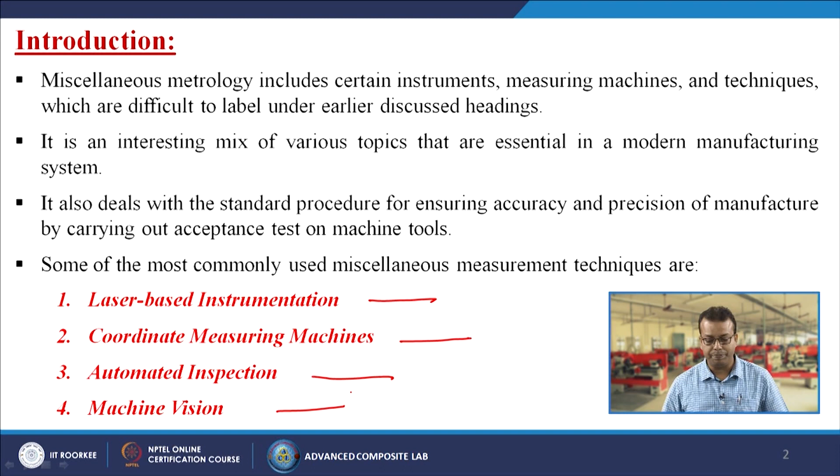So now first let us discuss laser based instrumentation. Generally these techniques are increasingly being used in applications like machine tool assembly to ensure the perfect alignment of machine parts. Traditionally lasers were more used by physicists than engineers, since the frequencies of lasers were not stable enough. So what is the full form of laser? Light amplification by stimulated emission of radiation. It is an intense emergent beam of light that can be parallel to a high degree or can be focused onto a very small area. Although a number of materials may be used to produce lasers, the helium neon gas laser is the most popular for applications in metrology.

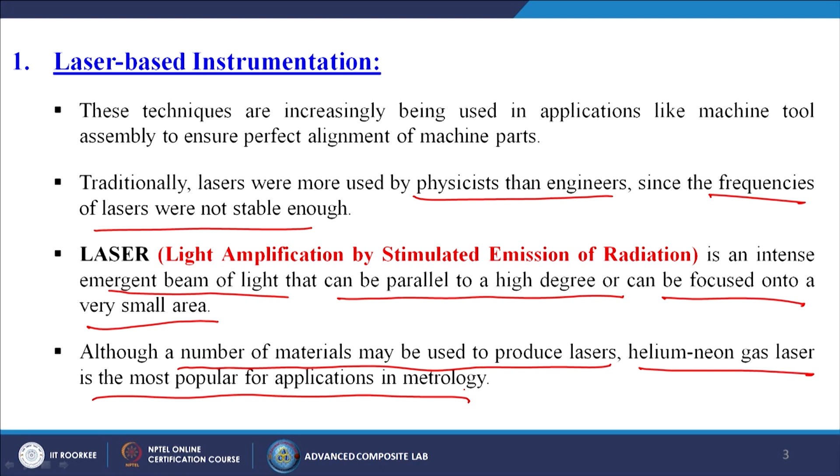Now what are the properties of laser? For the purpose of measurement, laser has some additional properties that are not possessed by ordinary light. First, it is monochromatic. Laser light has bandwidth in the range of 0.4 to 0.5 micrometer. Stabilized lasers have still narrower bandwidths, with the result that very high resolution can be achieved during measurement. So laser light is monochromatic in nature, whereas ordinary light is polychromatic.

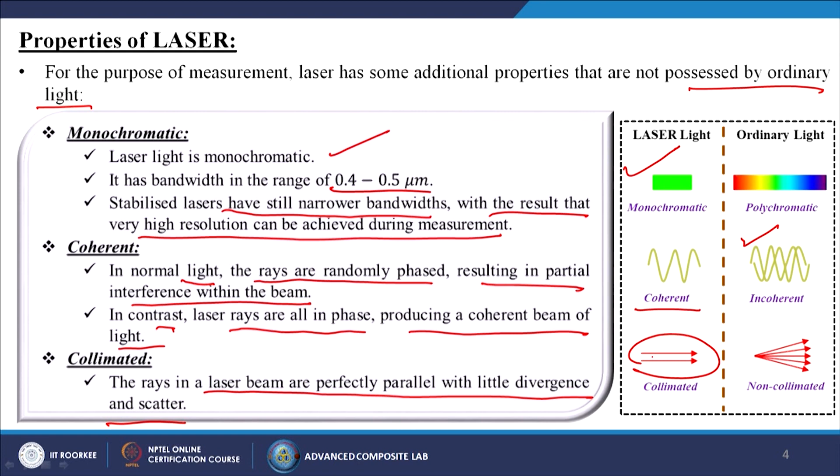Next comes coherent. In normal light the rays are randomly phased, resulting in partial interference within the beam itself. In contrast, laser rays are all in phase, producing a coherent beam of light. So laser is coherent, and ordinary light is incoherent. Then the last one is collimated. Sometimes you may have heard about collimated lasers. The rays in a laser beam are perfectly parallel with little divergence and scatter. So laser is collimated, and normal light is non collimated.

So what are the instruments based on laser principles? Like the laser scanning micrometer and the laser interferometer. The laser scanning micrometer features a high scanning rate which allows inspection of small workpieces even if they are fragile, at high temperature, in motion or vibrating. So what is the working principle? A transmitting unit emits a laser beam that scans at a very high and known speed across the measuring range. Every object placed in the measuring field interrupts the laser beam and casts its shadow into the receiver. By measuring the shadow time, the outside diameter of the part can be exactly computed.

In addition to the diameter measurement, by checking other combinations of light and shadow segments, it is possible to measure any other dimensions related to the shadow cast by the part. So simply, I have the cylinder, I have the emitter which is generating the laser, and the laser passes by that particular cylinder and comes into the receiver end. So we measure the light and how much time it is taking to pass through that particular material. If the material has some pores or cracks, automatically the laser will go faster.

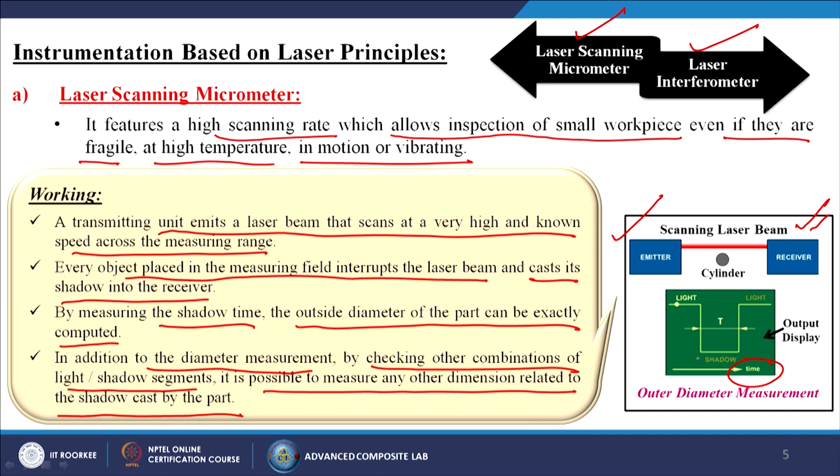If there is a certain obstacle, automatically it needs time. So, by calculating the time, easily we can detect whether there are any cracks or any kind of pores present or not, or whether the wall is a solid one.

What are the applications? Generally inline glass fiber or fine wire diameter we can measure through it, outer diameter and roundness of cylinders, gap between rollers, thickness of film and sheet, dual system for measuring large outside diameters, taper and form measurements. So, in all these cases generally we are using these techniques.

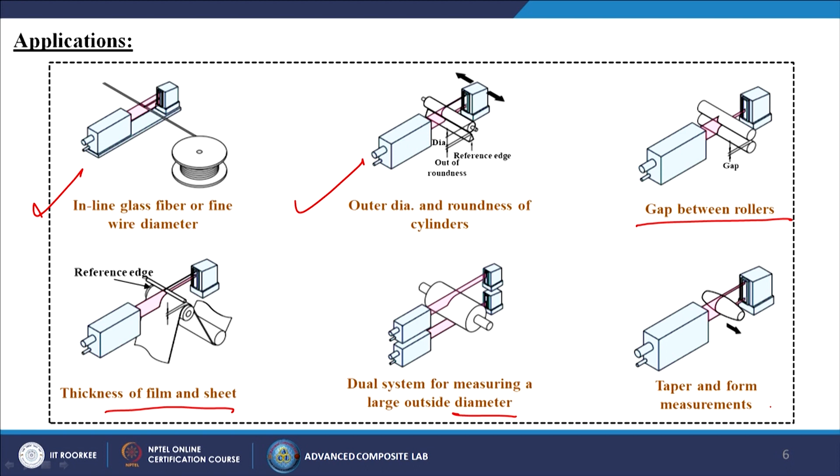Next, the second one is called the laser interferometer. In recent times, laser based interferometers are becoming increasingly popular in metrology applications. The fixed unit called the laser head consists of a laser, a pair of semi reflectors and 2 photodiodes. The sliding unit has a corner cube mounted on it. So, this is the schematic view of our laser interferometer.

So, how does it work? Generally the laser light first falls on the semi reflector P. So, here the laser is coming, this is the first reflector and then S is the second reflector. P is partially reflected by 90 degrees and falls on the other reflector S. So, directly it is coming to S. A portion of light passes through P and strikes the corner cube, here it is the corner cube.

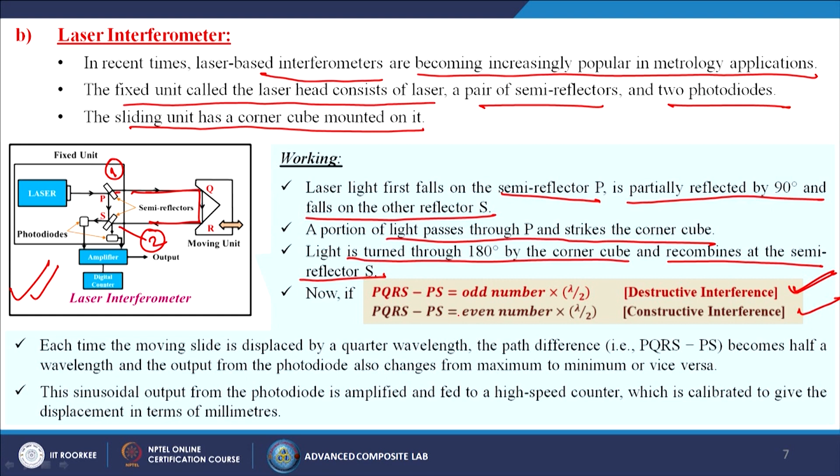Next, light is turned through 180 degrees by the corner cube and recombines at the semi reflector S. So, in this particular case it is coming, rotating exactly 180 degrees, and falling on S. Now, if PQRS minus PS is equal to an odd number into lambda by 2, that is called destructive interference, and if PQRS minus PS is equal to an even number into lambda by 2, that is constructive interference.

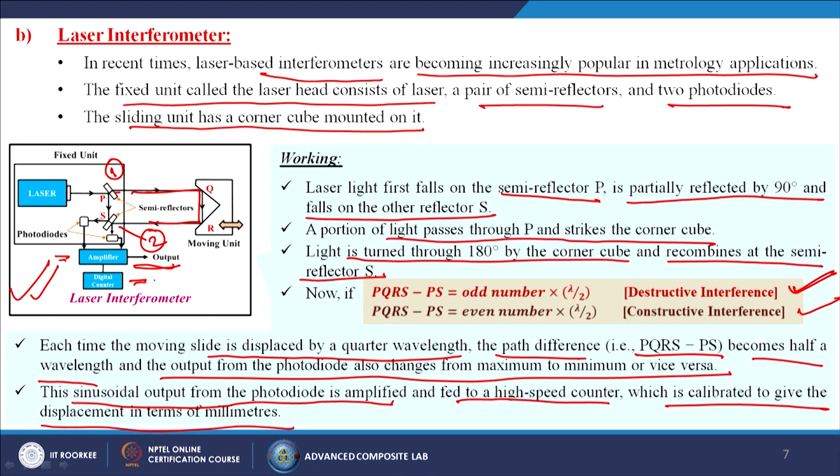Each time the moving slide is displaced by a quarter wavelength, the path difference, that is PQRS minus PS, becomes half a wavelength and the output from the photodiode changes from maximum to minimum or vice versa. This sinusoidal output from the photodiode is amplified and fed to a high speed counter which is calibrated to give the displacement in millimeters. So, here is the output we are getting through this amplifier, and now we have the digital counter.

Now, next we come to the coordinate measuring machines. In short, it is known as the CMM. This is a widely used technique. So, how is it working? Measuring machines refers to the single axis measuring instrument, and coordinate measuring machines are capable of measuring in all 3 orthogonal axes. So, that is the difference.

So, a CMM enables the location of point coordinates in a 3-dimensional space. It simultaneously captures both dimensions and orthogonal relationships. Another remarkable feature of CMM is its integration with a computer. So, directly we are getting the results into the computer itself. The computer provides additional power to generate 3D objects as well as to carry out complex mathematical calculations. Complex objects can be dimensionally evaluated with precision and speed.

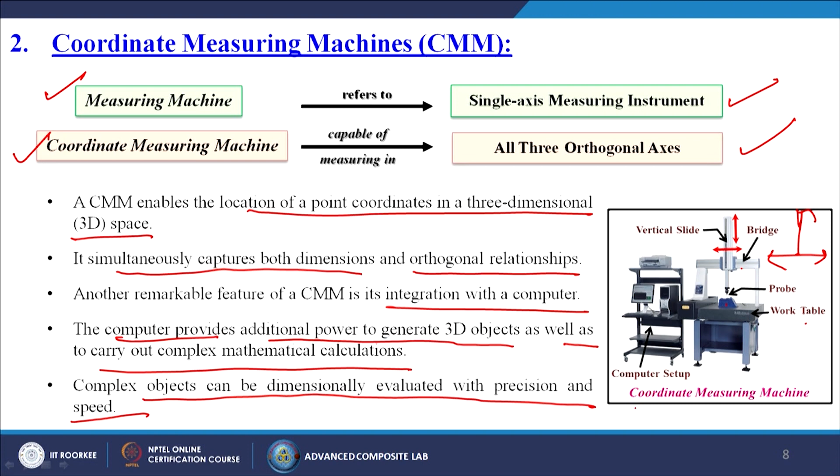So, now we have the bridge and the vertical slide. That means it can move in the vertical direction, and it can move along the bridge also, so it can move in the x and y directions together. This is our probe, and this is the work table, on which we put our workpiece, and this is the computer setup where we get our results. So, this is the coordinate measuring machine.

Comparison between conventional and coordinate measuring technology. A comparison of coordinate metrology with conventional metrology shows the important advantages of CMMs. Conventional metrology: manual, time consuming alignment of the test piece. For coordinate metrology, alignment of the test piece is not necessary. In the conventional case, single purpose and multi point measuring instruments make it hard to adapt to changing measuring tasks. For coordinate, simple adaptation to the measuring tasks by the software itself. Now, software is doing everything.

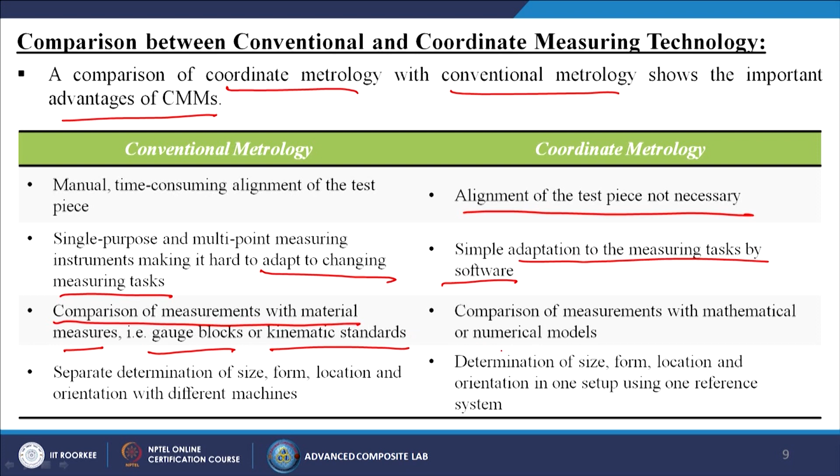Next, for the conventional case, comparison of measurements with material measures like gauge blocks or kinematic standards. Whereas for the coordinate system, comparison of measurements with mathematical or numerical models.

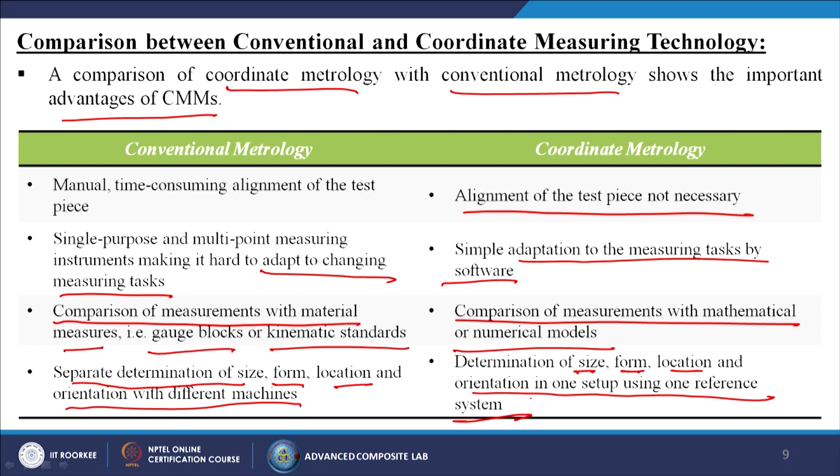For conventional metrology, there is separate determination of size, form, location and orientation with different machines; it is not a combination. Whereas a CMM can measure the size, form, location and orientation in one setup using one reference system. So, we can get all the results from a particular equipment.

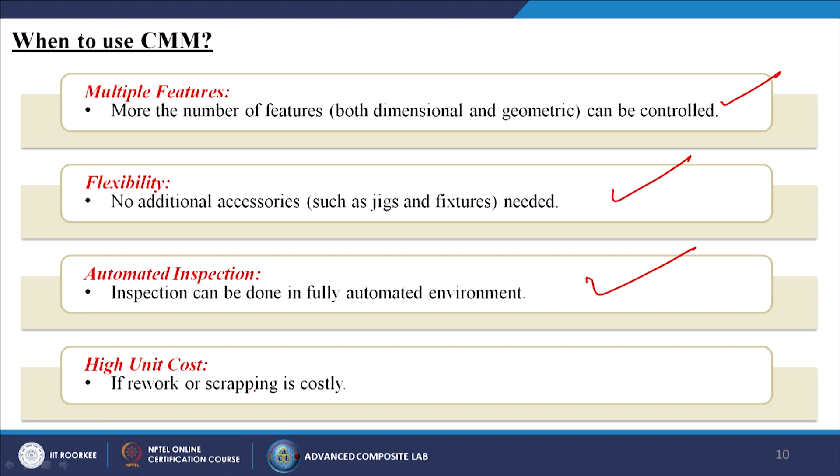Then when to use the CMM? Multiple features: more features, both dimensional and geometric, can be controlled. Flexibility: no additional accessories such as jigs and fixtures are needed. Automated inspection: inspection can be done in a fully automated environment. And high unit cost, if rework or scrapping is costly. Then the structure of the CMM: the basic version of a CMM has 3 axes along 3 mutually perpendicular directions.

So, in this particular case you can see it can move in the x axis, the y axis and the z axis. So, if I have one object, from all 3 sides it can measure the exact dimension, shape, size or maybe the defects. A carriage is provided for each axis, which is driven by a separate motor. The 3 carriages of a CMM form a Cartesian reference coordinate system. The work volume is cuboidal.

Each axis is fitted with a precision measuring system which continuously records the displacement of the carriage from a fixed reference. The third axis carries a probe. When the probe makes contact with the workpiece, the computer captures the displacement of all 3 axes.

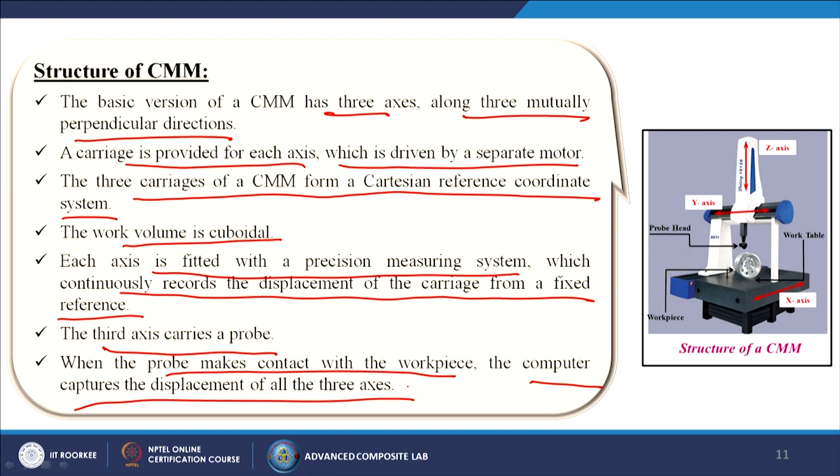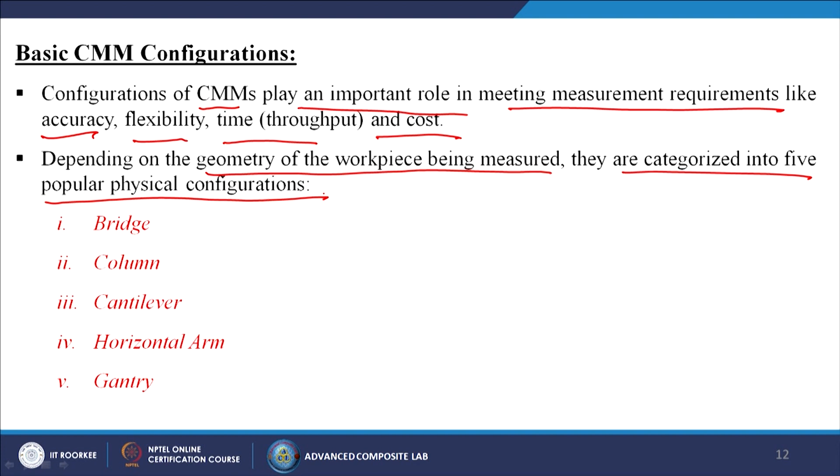Basic CMM configurations. Configurations of CMMs play an important role in meeting measurement requirements like accuracy, flexibility, time, that means throughput, and of course the cost. Depending on the geometry of the workpiece being measured, they are categorized into 5 popular physical configurations: the bridge, the column, the cantilever, the horizontal arm and the gantry.

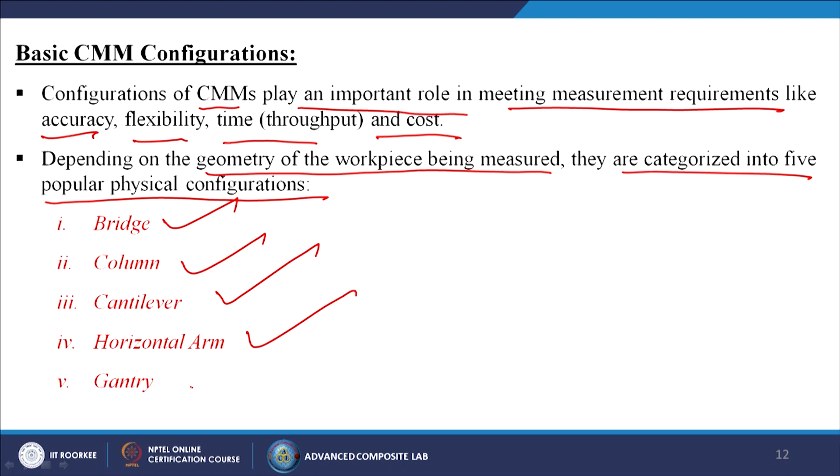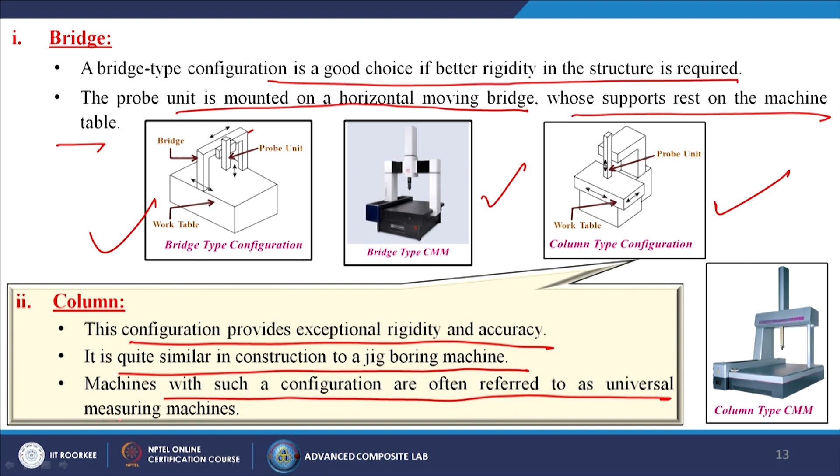The machine looks like this, and this is known as the column type configuration. In this case this is moving in these directions and the table is moving in these directions. The column configuration provides exceptional rigidity and accuracy. It is quite similar in construction to a jig boring machine. Machines with such a configuration are often referred to as universal measuring machines, and this is the column type CMM.

Now, we come to the cantilever. The vertically positioned probe is carried by a cantilevered arm. You can see the cantilever arm; there is no support on this side. The probe moves up and down along the z axis while the cantilever arm moves in and out along the y axis, and the table moves in the x direction. So, the longitudinal movement is provided by the x axis, which is the work table. The configuration provides easy access to the workpiece and a relatively large work volume for a small floor space. This is the image of the cantilever type CMM.

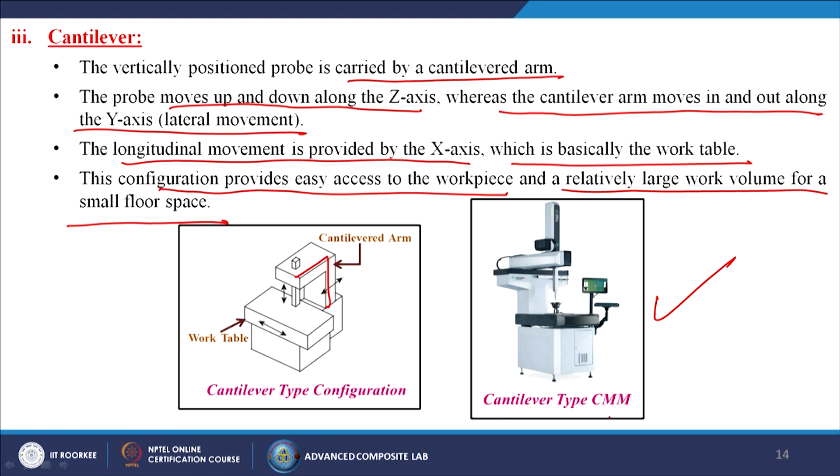Now, we come to the horizontal arm. In this type of configuration the probe is carried by the horizontal axis. The probe assembly can also move up and down along a vertical axis. It can be used for gauging larger workpieces since it has a large work volume. In this case the probe arm moves in these directions, and the arm also comes up and down in these directions.

Now we come to the gantry, the last one. In this configuration the support of the workpiece is independent of the x and y axes. Both these axes are overhead and supported by 4 vertical columns from the floor. So, you can see this moves in these directions, this arm moves in these directions, and this can go up and down also.

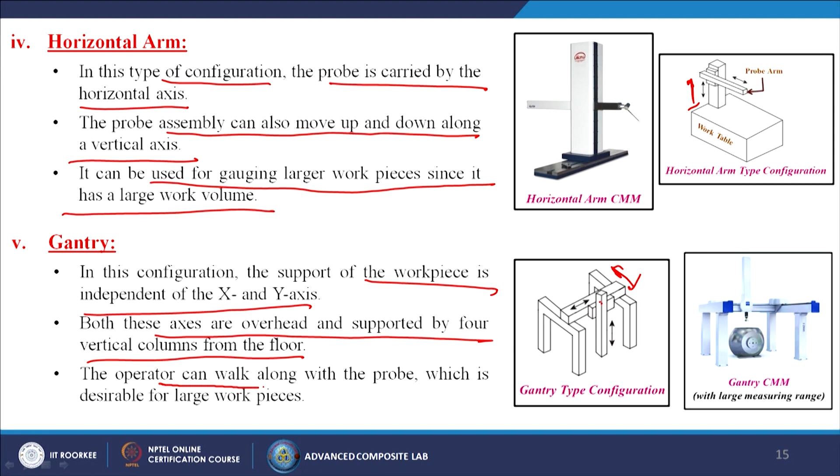So, the operator can walk along with the probe, which is desirable for large workpieces. Now, this is the image of the gantry CMM. Now, one question may come into your mind: which is the best, or which we are going to use, or which will give you the best results.

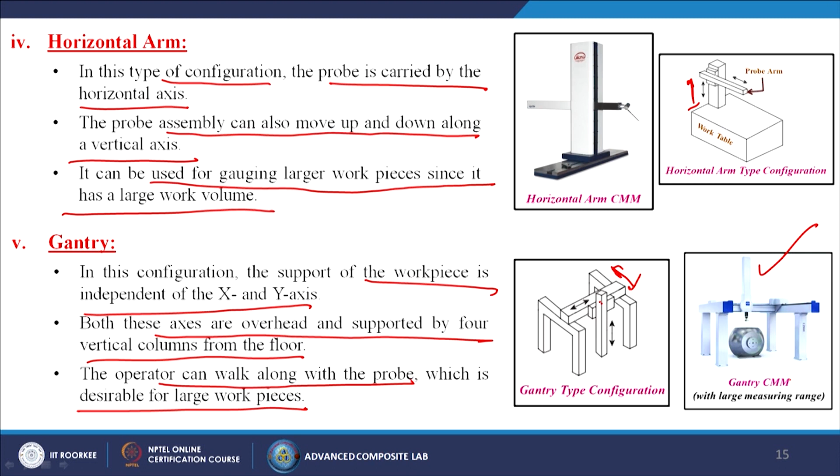See, the basic thing is how your material is, what is the shape of your materials. Based on the shape and size of your materials you can choose any of the options, because you need the results. At least you have to give flexibility to these measuring machines, so that the probe can reach all the corners. So, based on your shape and size you can choose any option which is suitable for your material shape.

Now, what are the modes of operations? Generally the modes of operations are quite varied in terms of type of construction and degree of automation. CMMs can be classified into the following 3 types based on their modes of operation. What are those? First one is called the manual, second one is called the semi automated, and third one is the computer controlled.

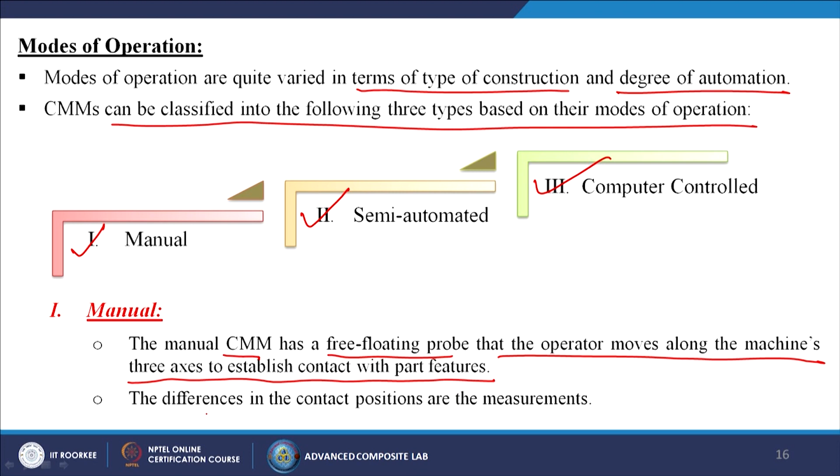When we are talking about the manual, the manual CMM has a free floating probe that the operator moves along the machine's 3 axes to establish contact with part features. The difference in the contact positions is the measurement. Now, the second one, the semi automated one. A semi automatic machine is provided with an electronic digital display for measurement. Many functions such as setting the datum, change of sign, and conversion of dimensions from one unit to another are done electronically.

And the last one is the computer controlled. A computer controlled CMM has an onboard computer which increases versatility, convenience and reliability. Such machines are quite similar to CNC machines in their control and operation. Computer assistance is utilized for 3 major functions. A programming software directs the probe to the data collection points. Number 2, measurement commands enable comparison of the distance traversed to the standard built into the machine for that particular axis. Number 3, computational capability enables processing of the data and generation of the required results.

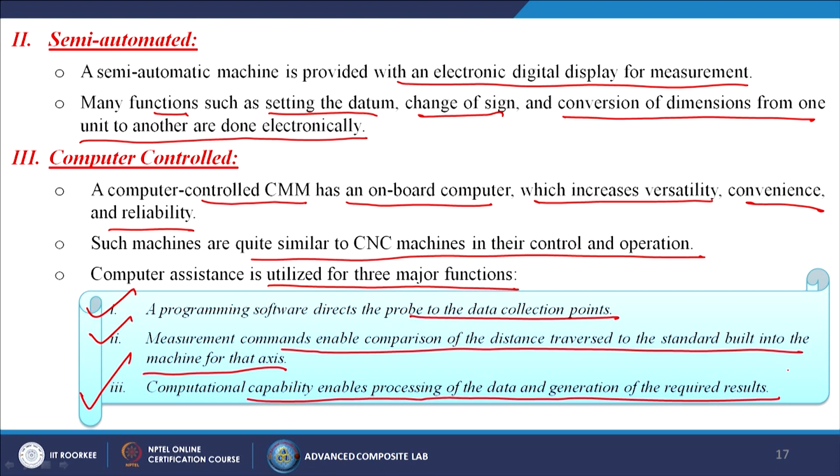Now, come to the probe. The probe is the main sensing element in a CMM. Various types of probes are used in CMMs, including mechanical probe, optical probe, laser probe, white light probe. These probes can be categorized as contact type and non-contact type. From the name itself you can understand contact type means the probe will touch your sample, and non-contact means the probe will not touch your sample. Contact type probes are in physical contact with the workpiece when the measurements are taken. Most non-contact probes employ a light beam stylus.

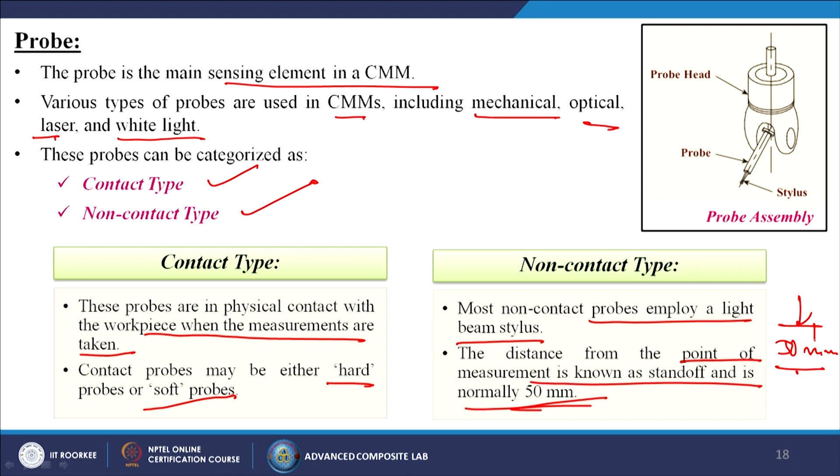Contact probes may be either hard probes or soft probes. Either it will just touch your materials, or it will be very soft, so that it can take a certain area and rub onto your surface itself. For the non-contact probe, the distance from the point of measurement is known as the stand-off and is normally 50 millimeters. So, there will always be a gap between your probe and your surface, and the normal, standard one is 50 millimeters.

Now, operations of the CMMs, how it works. A modern CMM is very similar in operation to a computer numerical control machine, because both control and measurement cycles are under the control of the computer itself. The software provides functional features comprising the following 3 components: move commands, which direct the probe to the data collection point. First it will go to the place you are locating. Second, measurement commands, which result in the comparison of the distance traversed to the standard built into the machine for that particular axis. And the third is formatting commands, which translate the data into the form desired for display or printout.

Machine is programmed using readily available subroutines, mathematical operations and library programs already stored in its memory. So, now what are the major applications of this kind of techniques? First one is that it can be easily integrated into an automated inspection system.

A CMM may be interfaced with a CNC machine, so that machining is corrected as the workpiece is inspected. So, it is an online process: while the machining is going on, simultaneously we are checking its shape and dimensions. If there is any error found, automatically we are changing our input parameters, so that we can get the exact shape and size.

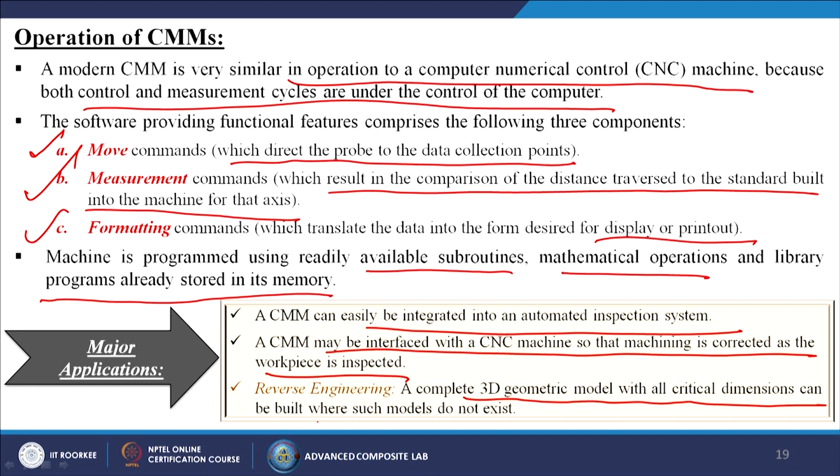Then reverse engineering: a complete 3D geometric model with all critical dimensions can be built where such models do not exist. Now, come to the third one, that is called automated inspection. Automated inspection in a general sense means automation of one or more steps involved in the inspection procedure. An example of a manufacturing system with automated inspection is the flexible inspection system.

Flexible inspection systems are formed by integrating production and inspection equipment into fully automated systems like FMS or CIM to achieve high production rate as well as to improve productivity. An FIS comprises one or more CNC machines, a transfer machine, a robotic handling system and a CMM. The controller continuously monitors the function of the CNC machines and directs the transfer machine to shift the work part to the CMM to carry out online or post-process inspection.

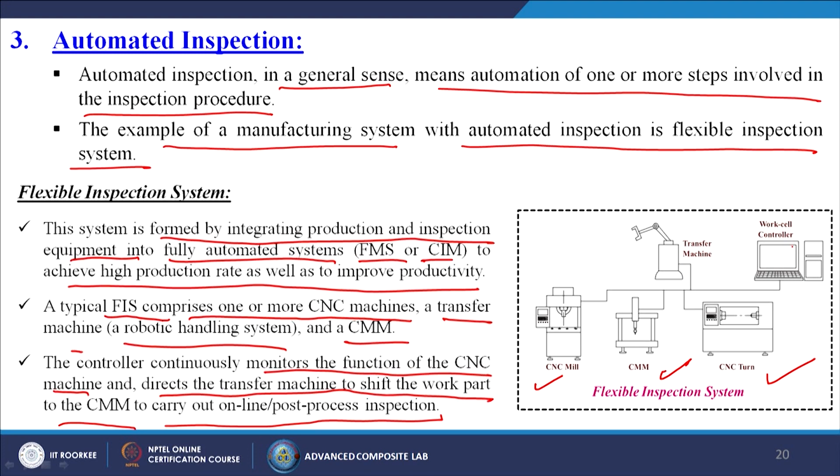So, that is a complex kind of inspection. We are having the CNC mills, the CMM, the CNC turning machines, and then it is going to the transfer machines, and from that it is going to the work cell controller. Now, the last one is called machine vision.

Generally, machine vision is the technology and methods used to provide imaging-based automatic inspection and analysis in industry. It extracts information from an image on an automated basis. The information extracted can be simple data like a good part or bad part signal, or a complex set of data like identity, position and orientation of each object in an image. Now, stages of machine vision.

The principal applications in inspection include dimensional gauging, measurement and verification of the presence of components. The operation of a machine vision system involves the following 4 important stages: image generation and digitization, image processing and analysis, image interpretation, and the last one is the generation of actuation signals.

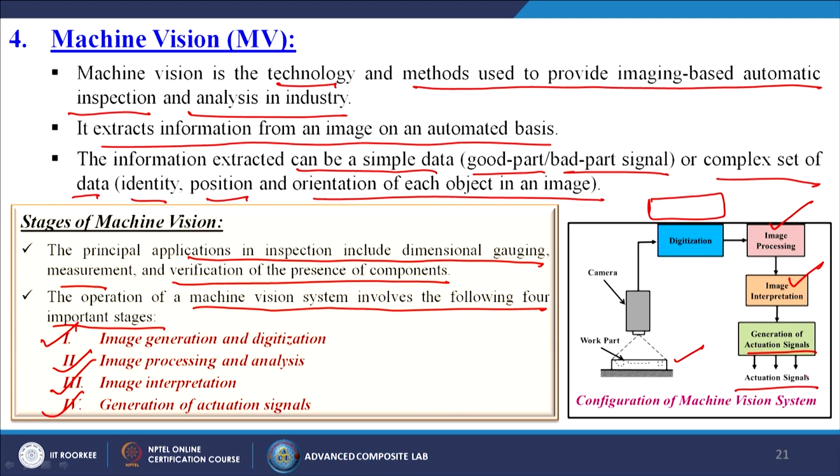So, in this particular case you can see we are having the work part, and through the camera we are taking the image. Digitization is taking place, after that we are processing the image, then image interpretation, what it means, gathering the information from the image, and then the generation of the actuation signals from that particular image.

First is image generation and digitization. The primary task in a vision system is to capture a 2D or 3D image of the work part. A 2D image captures either the top view or a side elevation of the work part. The work part is placed on a flat surface and illuminated by suitable lighting, which provides good contrast between the object and the background. The camera is focused on the work part and a sharp image is obtained.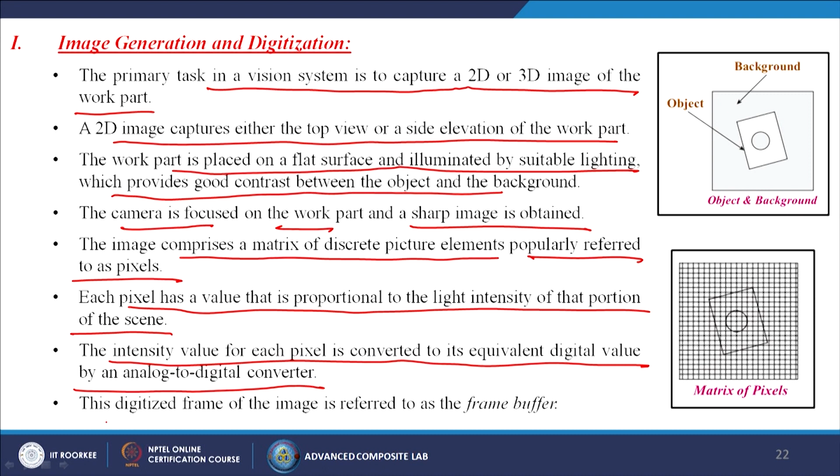The image comprises a matrix of discrete picture elements popularly referred to as pixels. Each pixel has a value that is proportional to the light intensity of that portion of the scene. The intensity value for each pixel is converted to its equivalent digital value by an analog to digital converter. The digitized frame of the image is referred to as the frame buffer.

Nowadays we are well versed with pixels and all these things, because when we are modifying some image or using some characterization techniques, we know how we are taking the image into signals. Next is image processing and analysis. Pre-treatment: information available in the frame buffer is refined and processed to facilitate further analysis, like noise removal and

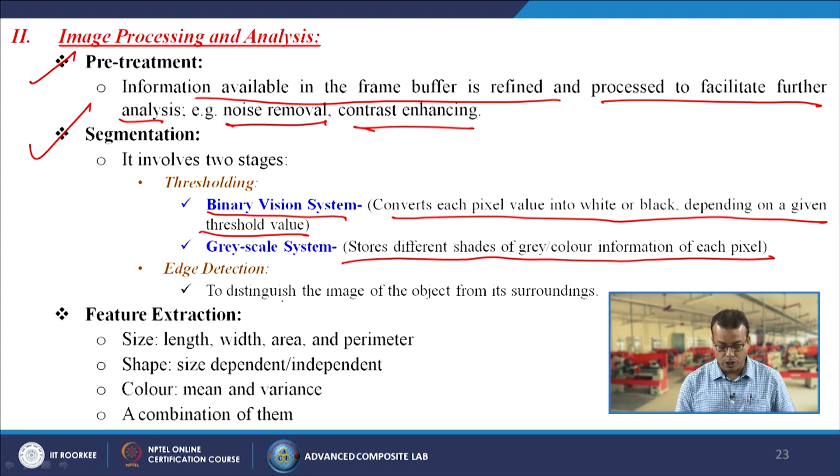contrast enhancing. Next, segmentation involves 2 stages, like thresholding: a binary vision system converts each pixel's value into white or black depending on a given threshold value, and a grayscale system stores different shades of gray or the color information of each pixel. Then edge detection, to distinguish the image of the object from its surroundings.

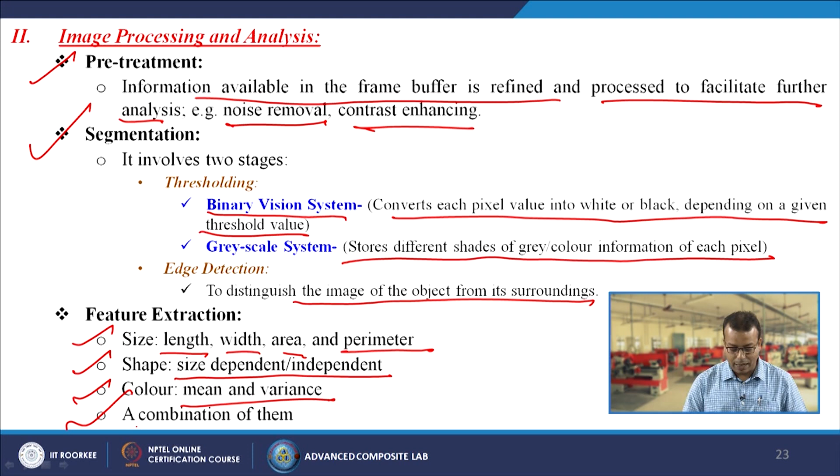Now feature extraction: size, where we can check the length, width, area and perimeter; shape, size dependent or independent; color, mean and variance; and the last one is the combination of them.

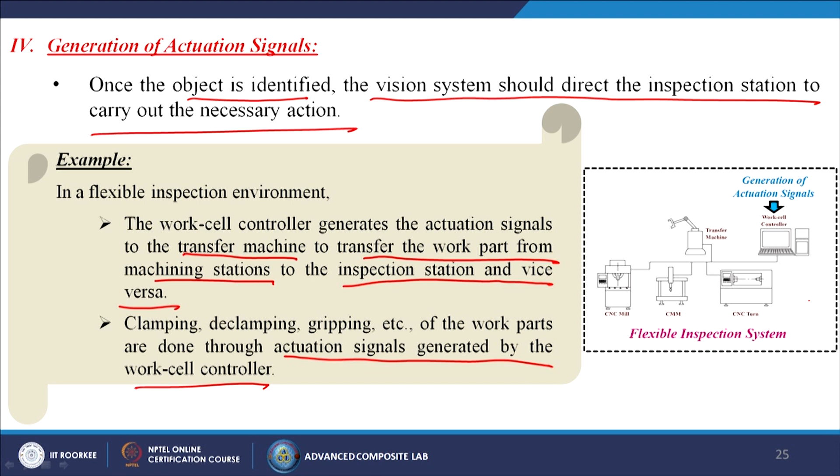Then fourth one is the generation of actuation signals. Once the object is identified, the vision system should direct the inspection stations to carry out the necessary actions. For example, in a flexible inspection environment, the work cell controller generates the actuation signals to the transfer machines to transfer the work part from machining stations to the inspection stations and vice versa. Clamping, declamping, gripping etc. of the work parts are done through actuation signals generated by the work cell controller. So, simply it is telling that your operation has been done, now we will send that particular part for checking. So, like this way we are doing this kind of testing.

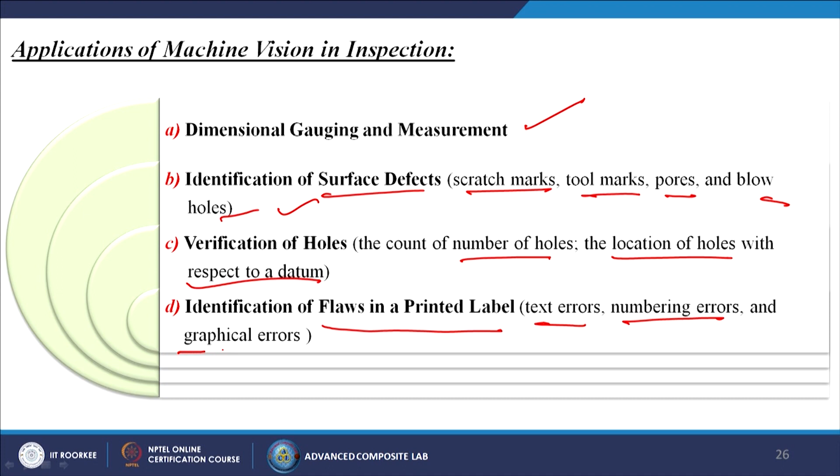Now, what are the applications of machine vision in inspections? Like dimensional gauging and measurements, identification of surface defects like scratch marks, tool marks, pores and blowholes, verification of holes, the count of number of holes, the location of holes with respect to a datum line, datum means nothing but the reference line, identification of flaws in a printed label like text errors, numbering errors and graphical errors.

So, we have come to the last part of this particular lecture. So, in summary we can tell that laser based instrumentation is the best choice for precise measurement due to its monochromatic, coherent and collimated behavior. A computer controlled CMM increases the versatility, convenience and reliability of measurement operations. In automated inspection, a computer serves as a real time controller to integrate the functions of several machines with the inspection stations. A machine vision system enables the identification and orientation of a work part within the field of vision and has far reaching applications.

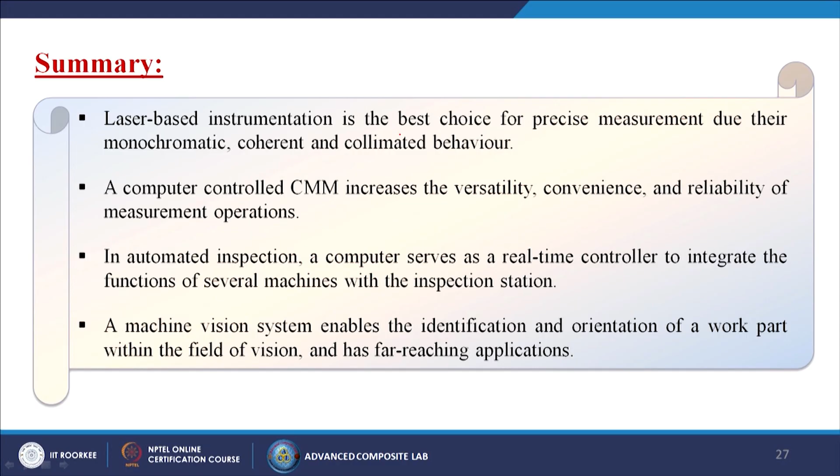Now, as I told already, this is the last lecture of this particular subject, that is the non-destructive testing of materials. We have already gone through a total of 20 lectures. So, now we are trying to give a brief outline of what we have discussed. Generally in manufacturing, quality control is a process that ensures the customers receive products free from defects and meet their requirements. Of course, when we are going to purchase certain kinds of materials, we are trying to purchase the best materials. It should not have any defects, any scratch, any kind of material loss or property loss. So, for this what we need? We need proper inspections and proper measurements, so that we can get the accurate shape, size and dimension of the product. So, inspection and measurement is needed during production for checking the products for their required specifications.

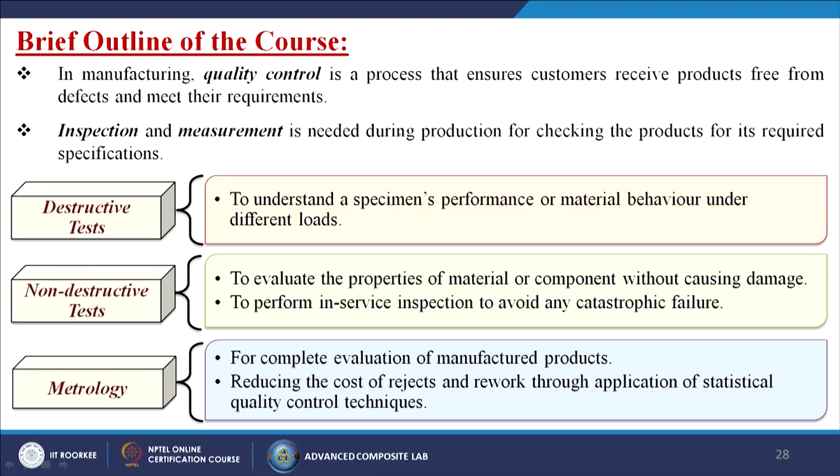So, in this lecture series we have discussed destructive testing to understand specimen performance and material behavior under different loads. We have also discussed non-destructive testing, where we are not harming the materials, we are not giving any kind of load pressure or breaking the samples or specimens, and we are simply measuring its outputs, dimensions or defects. So, to evaluate the properties of a material or component without causing damage, to perform in-service inspection to avoid any catastrophic failure. And last we have discussed metrology, that means how we can measure, which kind of techniques we generally employ for measuring different defects. So, for complete evaluation of manufactured products, reducing the cost of rejects and rework through applications of statistical quality control techniques.